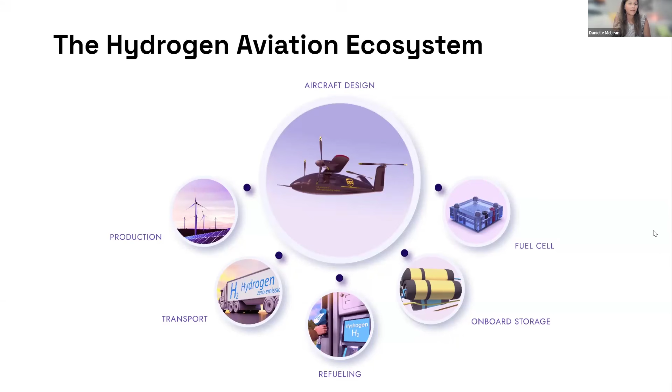So if you produce hydrogen, we need it, so you're part of the hydrogen aviation ecosystem. If you move hydrogen, you're part of it. So you don't have to specifically be building an aircraft to be part of this ecosystem.

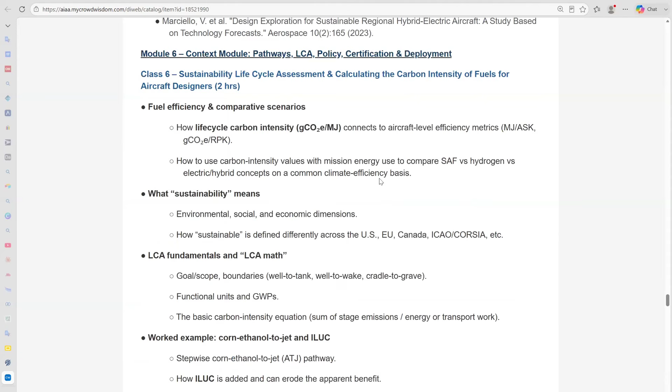This is going to be a really awesome course. We have 6 modules: combustion and engine integration, aircraft propulsion, design, materials compatibility, fuel systems, and safety. Then there's aircraft infrastructure, logistics, cross-border SAF supply chains, the MDO, digital frameworks, and lastly pathways, policy certification, and deployment.

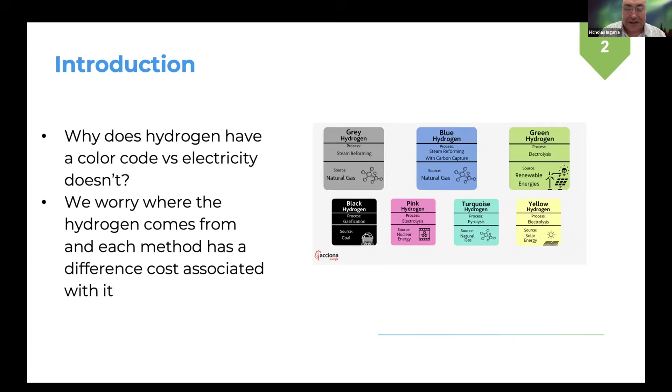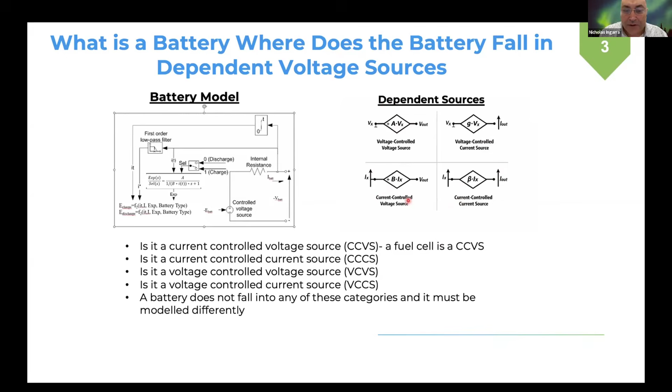And so Danielle already covered about me. So what I wanted to do to kind of gauge everyone, to get everyone's feet wet on the presentation - a lot of us have to work together to achieve the end goal. We need people to go, how does it work? How do I use it? How do I make it? How much does it cost? And how do I market it? We need people in every one of the groups to convey this message. My area of expertise is how does it work. So I'm trying to help unlock everything in the how does it work end of it so we can hand it off to how do I use it.

How do we make it? How much does it cost and how do I market it? A lot of this is going to focus on how does it work?

The other side note is I kind of look at everything from a thermal background, from power in, power out, energy in, energy out, and inefficiencies lead to heat. So we're getting a partial thermodynamics lesson here as well.

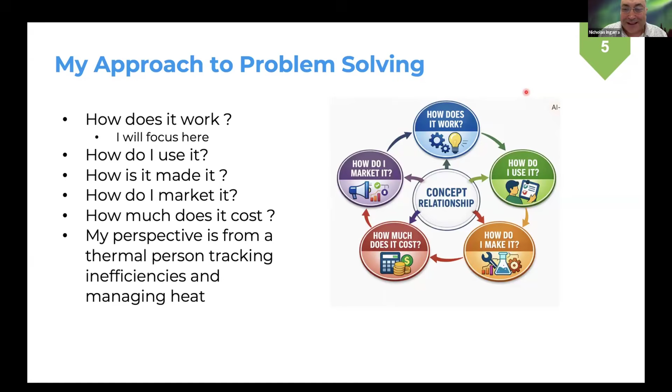When we think about aviation in general, we need to think of three different models that need to work together. We're going to have the vehicle model of the plane, which is used to determine the power and energy that's required. We're going to have a powertrain model, which is delivering power from the source to the propellers - basically how we're delivering the power.

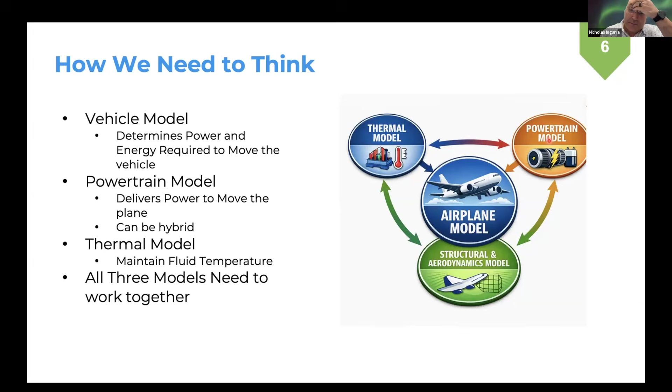We also have the thermal model. The thermal model's job is to take the inefficiencies of the powertrain model and maintain all the fluids at the right temperature so we don't get power limiting based on, let's say, battery temperature, or power limiting based on engine temperature. So we need all three of these models to work together to achieve the overall end goal.

Just to walk through the vehicle model and the math: we can take the aerodynamic parameters of the airplane, compute the power, and then with the mechanical efficiency and propeller efficiency, we can compute the amount of power the powertrain has to deliver. Note, when we're dealing with a vehicle model, we're dealing with the power at the end point.

So we have to convert this power to what the powertrain needs to deliver, and that's normally done through the inefficiencies of the driveline. You have to take the efficiencies of your transmission, in other cases the inefficiencies of the inverter - all those inefficiencies to compute the actual power that's needed at the source.

Another couple points to keep in mind as well: batteries can only store energy, and fuel cells in other cases - which is a key point - can provide power on demand, like the internal combustion engine.

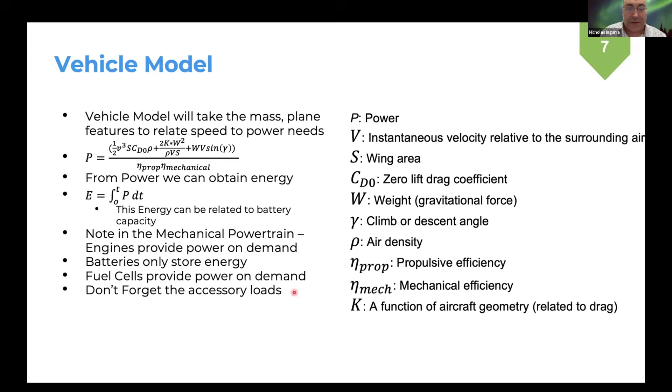One other friendly note: when you're doing the vehicle modeling, never forget to add in your accessory loads - that's your low voltage system, your climate control system. All those loads need to be provided by what the powertrain needs to deliver.

Now with part of the vehicle model, we need to understand power and energy. This reference came out of an ACS paper in regards to power and energy profiles. When we're selecting a power source, we need to find something that can meet our instantaneous power demand, then our cruise demand, and then our descent.

One thing to keep in mind as a point of reference: when we're dealing with internal combustion engine powertrains, they're providing power on demand. So when we're taking off, we can hear the engines ramping up to a high power load to satisfy the takeoff, and then they slowly ramp down to provide the power for cruising.

In the case of a battery system, the battery would have to provide the power that's needed for takeoff and then provide cruise. And in the fuel cell case, we need the fuel cells to provide on-demand power for climb and for cruise. So we need to keep these in mind for the power and energy requirements throughout the whole profile.

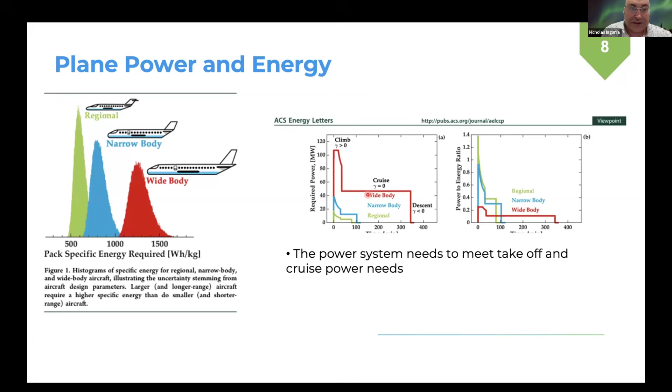We need to understand what our power profile is so we can compute the energy that's needed. Here's a case borrowed from the automotive world as a sample. Normally if you have your speed profile, you can compute with the vehicle model your on-demand power that's needed, and you can do this for each case.

This allows you to compute the instantaneous power. We do this to determine what the peak power, average power, and min power is in the system. And if we know power, we can integrate it to come up with the energy required. In a study like this, you can determine how much energy or battery capacity you need. And if you don't have enough battery on board, you can determine, hey, I need to recharge here and recharge here based on how many batteries I can package.

So we have to use our vehicle models to basically get our power profile that's required. We need to integrate that to determine how much energy we need. And based on also knowing the power profile, you can also determine how big of the hydrogen system do I need to support my flight.

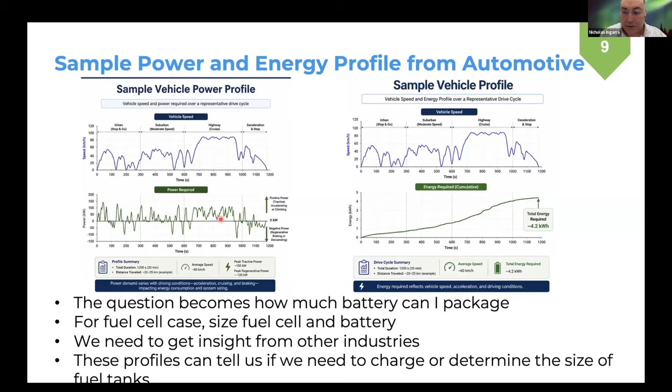Now let's take a look at the powertrain models to compare battery system to a fuel cell. So we have the propellers in both systems. We have the electric motors. We have the inverters in both of those cases.

The other difference is where we're getting the electrons from. In the fuel cell case, we have the hydrogen tanks providing the fuel cell stack with hydrogen to produce electricity. Then we have a boost converter to step up the voltage and current, or the inverter to the motor. In the case of a battery electric, everything is solely coming from the battery.

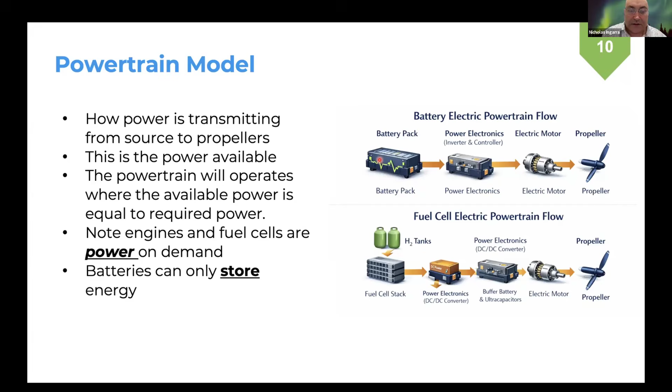One key note we have to emphasize is that a fuel cell can provide power on demand, and the batteries can only store energy. So we're either withdrawing energy that we have stored, and the battery can also accept energy too. So we have two different devices that do different things, but they also complement one another.

To touch on the really complicated system where I've spent most of my career, basically the thermal system. The thermal system is dealing with all the inefficiencies in the system, all that waste heat that has to be removed, and it has to handle the heat exchangers to cool the engines, or to cool the batteries, cool the fuel cells.

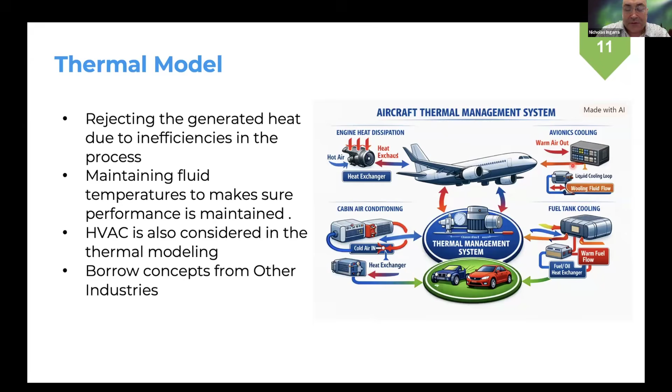In the case of batteries and fuel cells, we have to cool and we have to heat. The thermal systems will also have to handle the HVAC for the conditioning of the air, in the cases of the fuel systems to cool the fuel, and also for the power electronics cooling. So the thermal system is one of the key systems we need to look at when approaching aviation, because all three systems have to work together to actually get accurate results.

To add some humor and break the ice to make sure everyone's awake, think of batteries like babies. They can't be too hot. They can't be too cold. They've got to be kept at the right temperature. So we need to heat them and we need to cool them in those instances.

And the fuel cells are like the diva, where we can't have them too hot, we can't have them too cold, but the only difference is we need to maintain the relative humidity and the water content correctly. Because if we don't maintain the water content in the fuel cell, we'll either lose efficiency due to ohmic losses or we'll lose performance due to flooding.

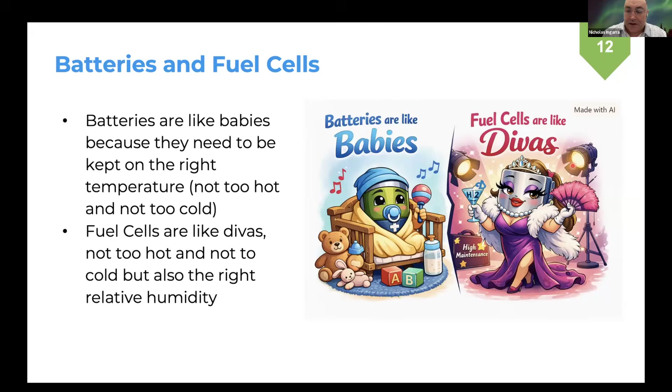Now I'd like to compare both technologies to one another, and I'm going to throw in some fun thermodynamics too. In a battery case, both systems are considered electrochemical systems that convert chemical energy to electricity. But here's some of the differences.

A battery has three different discharge modes: constant power, constant current, and constant resistance. I'll show those graphs a little later. The battery performance also depends on its C rate and its state of charge. And we have to note that batteries can provide constant power, but not at constant voltage.

A fuel cell is different than a battery. It's a steady state device because it's like an engine, but it doesn't store the energy. It basically converts the hydrogen and oxygen into electricity, water, and heat. Fuel cells mainly have one discharge mode because it's an on-demand power source, and its properties are constant as long as you're providing the fuel.

So when we get into the battery system, a battery is kind of like a closed system. Think of putting a prime rib into an oven and the oven's sealed up. You have it sitting in there and you can only heat it or cool it by turning the knobs on the oven. So closed systems are a little bit harder to cool than open systems, where in an open system mass can enter and leave the system.

So I can either cool a fuel cell by transferring some of the heat to hydrogen, transferring some of the heat to air, or transferring the heat to the coolant.

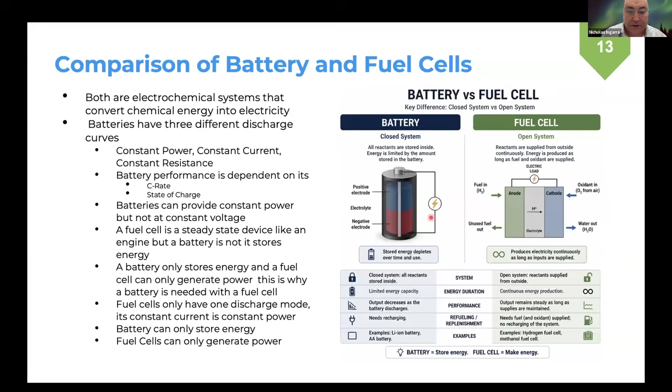One of the keys we need to look at when comparing technology is something called the Ragone plot. The Ragone plot basically compares specific energy to specific power. Specific energy is how much energy is stored per kilogram, and specific power is how many watts generated per kilogram.

This chart compares capacitors to ultracapacitors to flywheels to the internal combustion engine, older battery technologies, and fuel cells. Fuel cells have pretty good specific energy compared to the combustion engine. Batteries are somewhat close on specific power, but you have limited run capability based on the battery. So fuel cells can do the job on a little less weight, but we should note both batteries and fuel cells cannot replace the full power of the internal combustion engine.

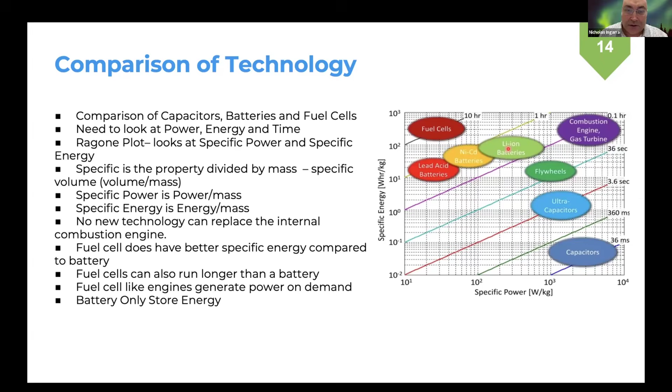The internal combustion engine wins out on power and energy, but it seems like number 2 is the fuel cell and number 3 would be the battery. Keep in mind, it's not a one-size-fits-all scenario. Some cases you will need a fuel cell, some cases it will be a battery. We need both technologies to go forward in the aviation industry, and it's a case-by-case basis.

Another type of Ragone plot compares different battery technologies to one another. The newer technology coming out is sodium. It's a little less on power density, mainly because sodium is heavier than lithium, but it offers some differences, like you can fully discharge a sodium ion battery. Lithium ion batteries can't be fully discharged to zero; you have to keep their minimum cell voltage about 2.5 volts per cell.

But you can see where the lithium ion energy and power density is. The only way to maximize the energy density is with a lithium metal anode, and some companies are looking into lithium metal anodes right now, but you need pure lithium metal anodes to push the volumetric density. The other reason lithium ion batteries have higher energy than sodium is you get 4.2 volts per cell, while sodium's approximate open circuit voltage is about 3 volts. OCV just stands for open circuit voltage.

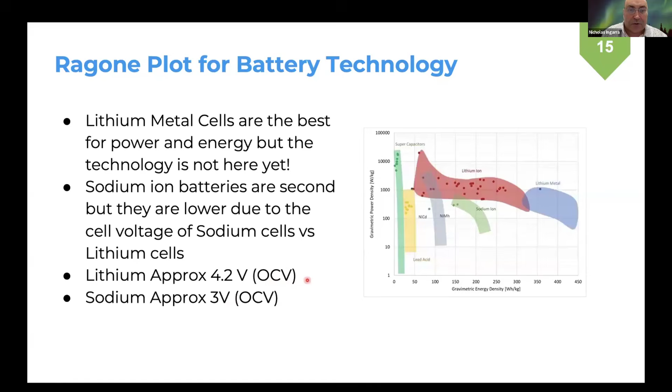Another note on battery chemistries: lithium ion has several different chemistries. You have lithium cobalt, lithium manganese, lithium iron phosphate, nickel manganese cobalt, NCA which is nickel cobalt aluminum, and LTO which is lithium titanate. Typically in batteries you'll always have a trade-off chart because you can't have your cake and eat it too with the technology. If you get something with good power density like LTO, it's not going to have great energy density, so you'll have a weight penalty.

So you have a couple different types of batteries, which can basically be broken down into power batteries and energy batteries. Power batteries are like your sprinters, and energy batteries are like your marathons. Power batteries can give you rapid power but don't have great energy storage, while energy batteries can give you great storage but don't like to discharge at extremely high power rates.

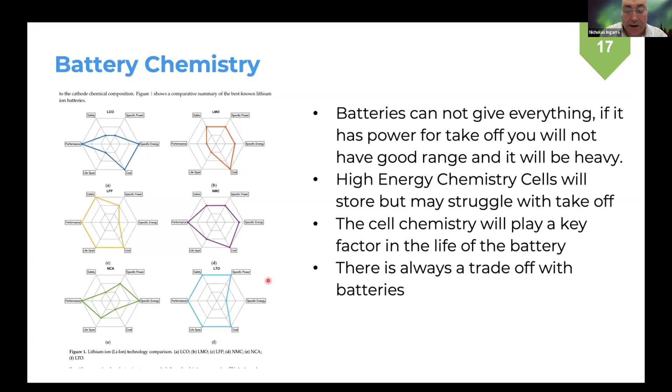So you can see there's always trade-offs on power, energy, cost, life, performance, and safety. You have to find a battery that'll meet your requirements and also meet the weight requirements too, since weight is critical in aviation. Now here's some of the differences, kind of like an A to B comparison of batteries to fuel cells.

A battery is a storage device compared to a fuel cell, which is power generating. As we mentioned, we have a closed system, so no mass is allowed to enter or leave the battery. Fuel cells are open, so as long as we're providing mass to the fuel cell, it will provide us with power. Our battery is a non-steady state device, so we have to model it differently compared to a fuel cell, which is more of steady state.

We can have constant power, but not at constant voltage. For fuel cells, we can get a constant power delivery out of it. For a battery, its efficiency is going to be continuously changing, and I'll show this a little bit later on with breaking down the battery data. Fuel cells have a steady state efficiency, so whenever you're hearing an efficiency calculated on a fuel cell, it's provided under steady conditions with a steady flow rate of fuel, steady flow rate of air, and a steady output.

Another factor we need to keep in mind when selecting batteries and fuel cells for our application is that chemistries have different operating ranges and can only do so much. For instance, the nickel cobalt aluminum chemistry can operate from 0 to 45 C, and keep in mind these are noting the charge and discharge cases. You can go up to 50 C for nickel manganese cobalt and 60 degrees C for LFP.

Typically you can charge your battery between 0 and these temperatures, but when the temperature drops below 0 degrees C to minus 30, your battery can only discharge, it cannot charge. So if your battery is cold, you need to heat it up and precondition it for charging. If you're flying at elevation and your battery starts getting cold, you're going to have to warm it up to get it out of this temperature range so you can charge.

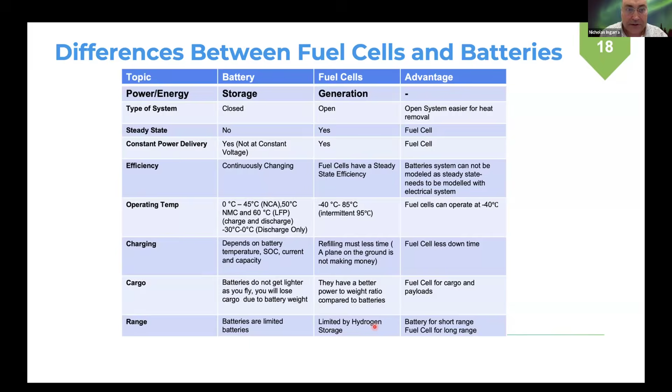Now here's a precursor on battery efficiency. Right now, when you say a battery efficiency is between about 90 to 95% efficient, that's based on the combination of the coulombic, or sometimes the Faradaic, and the voltage efficiency. The coulombic efficiency is basically the discharge over charge ratio.

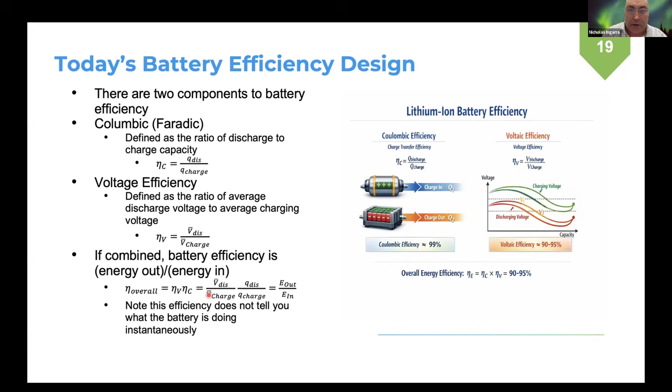So how much charge am I taking out versus how much I'm putting in? The voltage efficiency is my average discharge voltage divided by my average charge voltage, which is based on energy out over energy in. But this efficiency doesn't tell me real time what's going on. This tells me on average from point A to point B what this efficiency is. It does not tell me real time what it is.

So now you have a dynamic map for the battery. Its performance is changing real time on how efficient the battery is over, let's say, 100% to 10% state of charge, because we could never hit zero. So this is a proposed efficiency change that we need to make for batteries, which is eventually going to impact how we model battery systems.

I'll jump into a point I've emphasized before. Batteries have three distinct modes of discharge: constant current, constant resistance, and constant power. Which one do we need for our application? Well, the answer depends on the type of load that you put on the battery. And we'll also have to note that the resistance, the voltage, the power delivery, and efficiency are all a function of the state of charge, the C rate, and temperature.

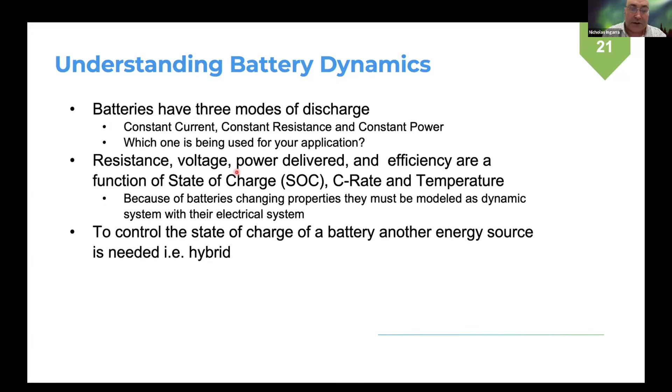So we have to start modeling batteries dynamically. One other side note is that if it's a hybrid system, so if the battery is paired with another component like an engine or fuel cell, you can control the state of charge of the battery and therefore almost get constant properties out of the battery. But this can only be done if you have another power source and the battery is not the only power source. So let's walk through the battery.

On the other hand, a PEM fuel cell's fundamental unit is a polarization curve. Based on providing a given amount of hydrogen and a given amount of air, you're going to get a discharge voltage based on a current density. As the current density rises, you can see what's happening to the power—voltage drops, current starts going up. It's analogous to an engine curve where you have a peak torque and a peak power. In this case, you're going to have a particular voltage, and then you can see what happens to the power, and you're going to have a peak power on the fuel cell.

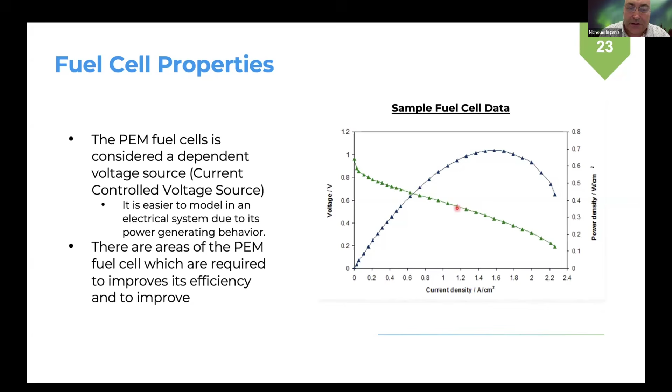So your ultimate goal for fuel cell design is to try to hit an optimum peak power point of what's going on. But these values are steady state values as long as the hydrogen and air are flowing to your fuel cell system.

And for constant power, your voltage starts dropping greatly because your current is going to be continuously increasing. So what happens in the constant power discharge, which will affect your modeling, is that your current starts increasing as voltage decreases.

So what does this mean? As current starts going up, your heat generation is going to go up due to joule heating, and the electronics can actually get less efficient, so you have to size your thermal system differently. You're going to need more rugged cold plates to get the heat out and prep for more heat generation, so you need a pretty good thermal system.

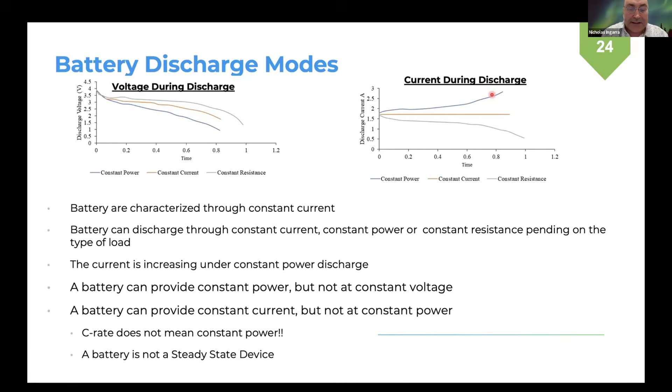So you can see constant current discharge, current remains constant, but under constant power, your current is always increasing as a result of your voltage decreasing. Please keep in mind, a battery is not a steady state device, so when you say C rate, you're not actually getting constant power.

So I mentioned before that the discharge voltage of a battery will depend on its state of charge and current, and the battery's not a steady state device. But I'm going to break down battery data and show you what the true resistance is of this cell, the power delivery, and the heat generation of this reference cell.

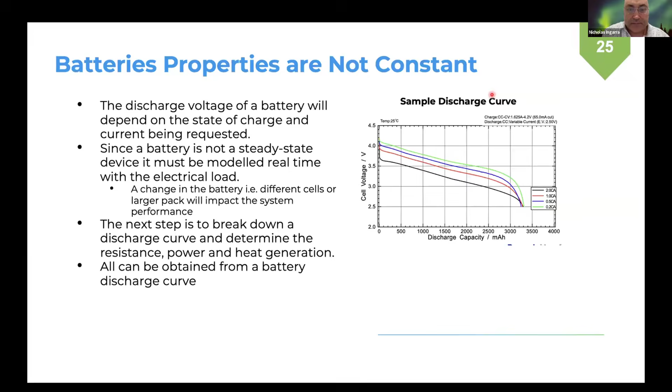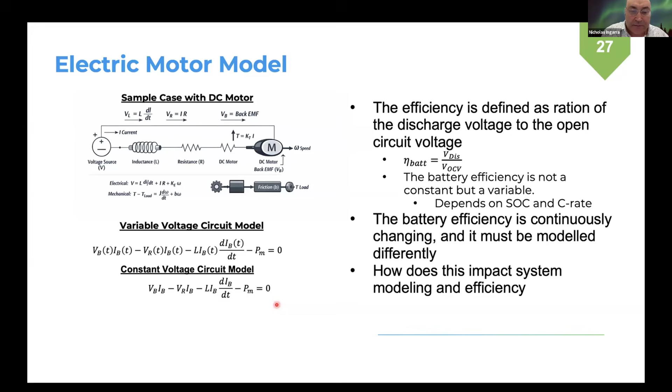And the efficiencies of the battery change are going to affect the variable voltage circuit model. Sorry, it's a little bit of a tongue twister.

We'll have to keep in mind with batteries that you have two different modes of charging. You'll have a constant current mode of charging, and then constant voltage charging. During constant current charging, your voltage on your battery is going to be increasing, so the charger is going to increase the voltage on its end to maintain constant current up to a certain point. But with lithium-ion cells, we cannot risk overcharging them and causing thermal runaway, so we eventually have to transition to a constant voltage point. When we have a constant voltage point, we set the voltage constant, and then the current is going to be changing. We have to do this at approximately 80%.

That's why with our battery electric vehicles, you can rapid charge up to 80%. And then it takes the longest for the remaining 20%, because you have to go with a constant voltage charge at that point to get it to 100%.

Keep in mind that a grounded aircraft isn't making us money, so we need to try to minimize charge time, and we need to factor in charge time.

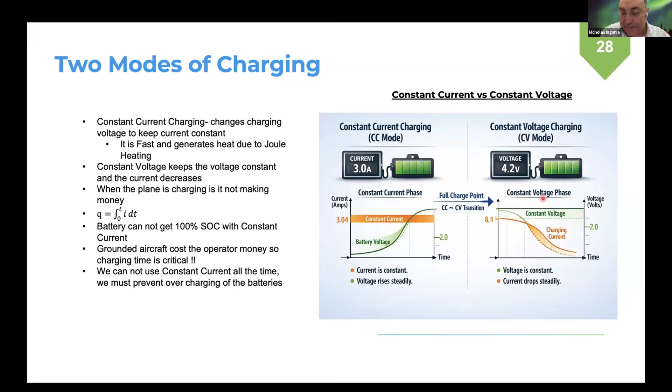Here's an overlay of how you would do charging for a pack. Under constant current, you charge up to a particular time, and during that time you switch over to constant voltage, where you can see the charge current drops off to finish the charging. It takes a lot to get there - this is the easiest part, but it's the hardest part getting that remaining 20%.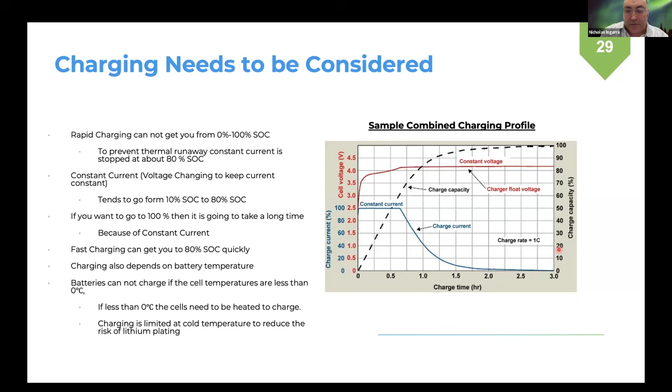Keep in mind too, if there is a cold battery, you need to charge it after you warm up the cell. You need to get the battery above 0 degrees C to prevent dendrites from forming and to get good charging. We've done the comparison of the powertrains.

So I'm going to go into one of the topics of comparing technologies of battery to fuel cell, which is basically what's called pump to wheel. It's borrowed from the internal combustion engine, basically from pumping in the fuel to the wheels.

Initially, I was told that batteries are much more efficient than fuel cells, based on like 70 to 75% versus 35 to 45%. But this is based off of a 95 to 98% efficiency. If we actually look at the real-time efficiency of a battery, this will bring this number down, which will impact the inverter, the electric motor, and the drivetrain. So this efficiency was based off of the original non-real-time efficiency.

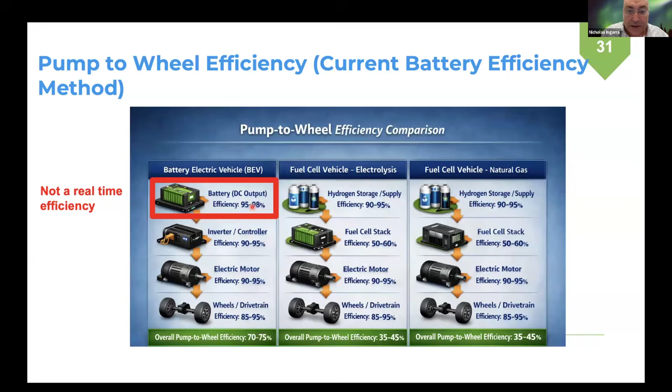That's how the comparison of battery electrics to fuel cells efficiency started. The battery efficiency is going to be changing real time, and this needs to be taken into account. To elaborate on this point - pardon the pun on current research - there's going to be an article published in a magazine called In Compliance that will go through this in detail.

One of the findings of the research I did was that input voltage will affect the current draw on a system under a constant power discharge. I took a battery electric vehicle and ran it from 630 volts up to 800 volts, putting a constant power load on it. As you can see, in certain cases, as the input voltage increases, the required current decreases.

How does this impact me? At higher currents, we're going to have joule heating, which leads to higher heat generation. The reason we went to higher voltage is to lower the current. But in a battery system, as voltage starts to come down, our current goes up, and so does our heat generation, which impacts the efficiency.

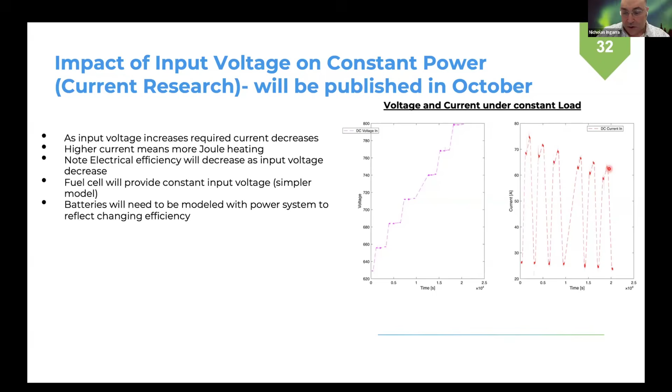This is an apples to apples comparison of the technologies to one another from a previous chart. WoW is worst of the worst case, and BoB is best of the best. If I assume constant efficiencies of the batteries as discussed before, a battery electric at worst case could be 65.4% compared to best case 84%. If we change the efficiencies based on that one cell - showing like 98 to about 75% efficient - we can see the efficiency drops to about 51.6%.

We should also note why there are stars here - as the input voltage changes, these components' efficiency has to be calculated real time based on changing input voltage. Based on the fuel cell, we can see its worst efficiency is about 34.4% compared to about 51.4% for best case scenario, with 60%.

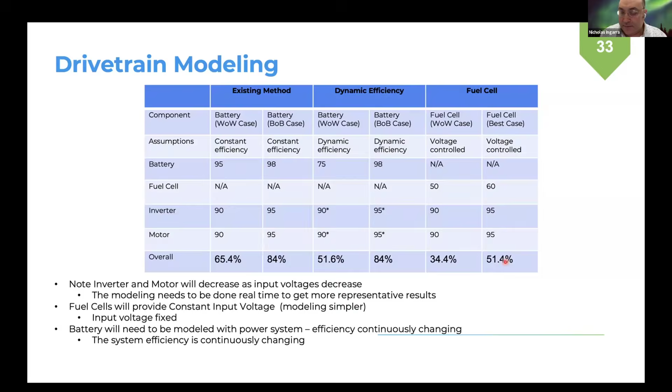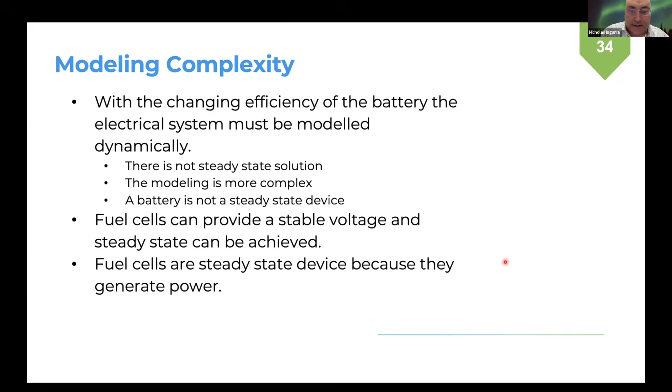In summary, we're going to have more modeling complexity - we'll have to model battery systems dynamically going forward on the battery side, mainly because a battery is not a steady state device. Then there's the other efficiency calculation, called the well-to-wheel efficiency, which is a way of comparing from the overall source of the power to the wheels.

As before, one of the reasons why battery electric is dominant is because of this 90 to 95% efficiency, which is not a real-time efficiency. Your hydrogen from electrolysis is about 25 to 35% efficient from electrolyzing the hydrogen to the wheel. And if you get the hydrogen from natural gas, the overall efficiency is about 30 to 40%. But the pump to wheel efficiency doesn't change, so it depends on how you get the hydrogen. But here's the key difference in battery electric: that number is not a real-time efficiency.

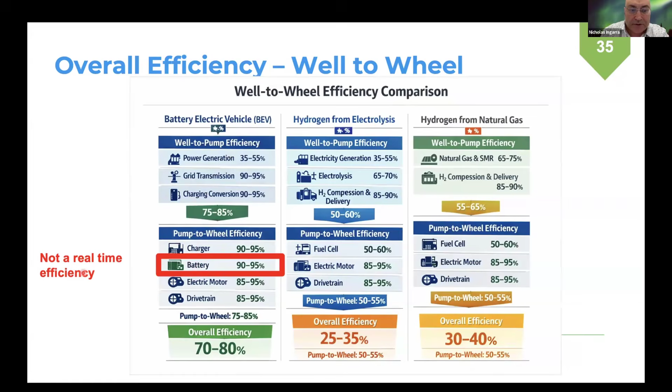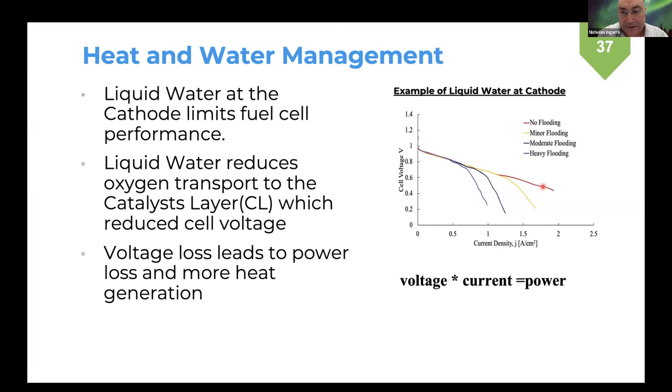Now I'm going to get into the challenges for the fuel cell going forward. One key issue with the PEM fuel cell is what's called flooding, which is a buildup of liquid water on the cathode, specific to PEM fuel cells mainly. If you don't get that water out, you lose your oxygen concentration, which pulls down your cell voltage. If you don't have any flooding, you can get a higher current density, and therefore higher power. So we have to manage the water and heat to mitigate flooding on the fuel cells.

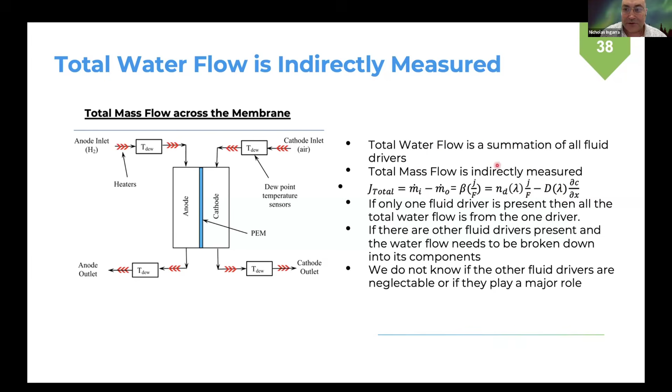Why does this occur? When we measure the water flow across the membrane of the fuel cell, we're measuring the summation of all the fluid drivers present. We can't measure an individual fluid driver by itself, only the summation. A better way of looking at it: there's two numbers that add up to 3, and you can't guess what one of the numbers is. You can't say one number is 1 and the other is 2 to get 3. You have to determine them mathematically and from theoretical models to know how much is electroosmotic drag and how much is back diffusion.

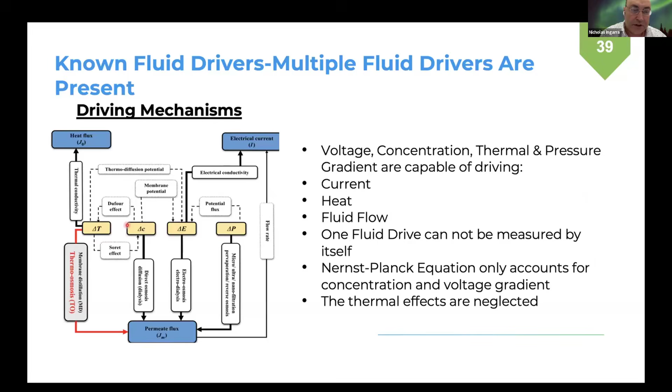Keep in mind there are many different ways to drive fluid flow in a fuel cell—we can drive it with temperature, concentration, voltage, and pressure. So we need a good understanding of how pressure, voltage, concentration difference, and temperature affect water flow. Currently, the Nernst-Planck equation only takes care of two of these, concentration and voltage, so we still have to assess the thermal effects.

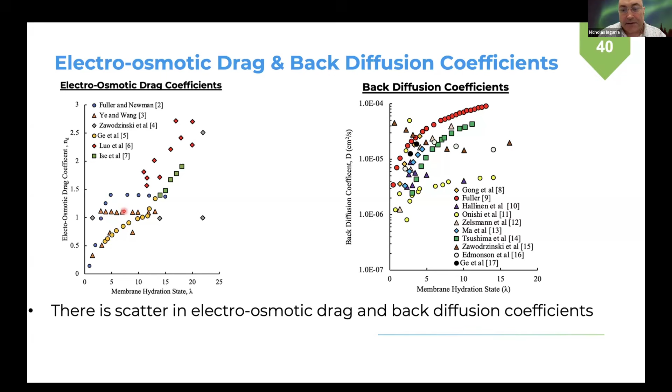Another item impacting water management on the fuel cell: we have a lot of variation in these electroosmotic drag and back diffusion coefficients. There are several empirical models out there, and each one, based on the hydration state of the membrane, gives different values. So we have a lot of scatter in these coefficients, and each can lead to different effects on calculated water flow across the membrane. The same applies to back diffusion. We need to find out where these models are valid and get them condensed down to which ones are applicable, and whether they have other fluid drivers baked into them.

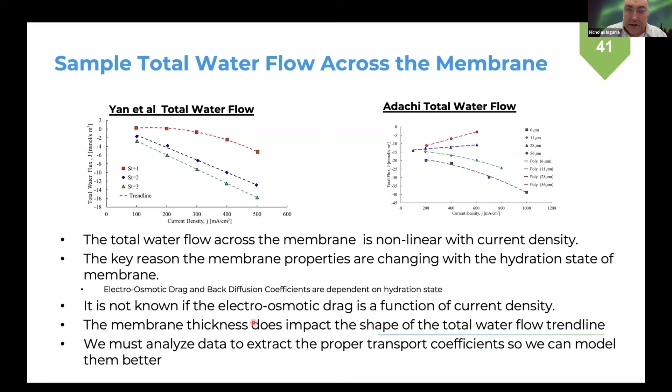Because what could happen is they might not have separated out the other fluid effects. The water flow across the membrane is very complicated—it's nonlinear in some cases, and pretty linear in others. This is a result of the membrane properties continuously changing. There's a speculation out there that electroosmotic drag is not a function of current density, so we have to understand the mechanism better, understand how membrane thickness impacts total water flow, and analyze these systems to extract the proper transport coefficients so we can better understand the models I showed on the previous slide.

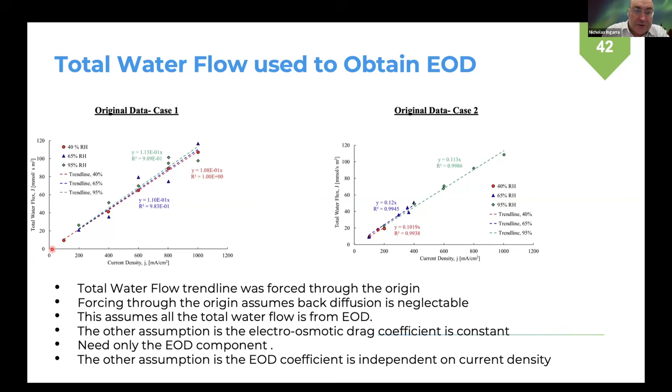Here's a sample case of one of the models that was done. What they did was force the trend line through the zero point, which assumes no other fluid drivers are present. By doing this, we don't know if the back diffusion was completely negligible or not. So we basically refit the data—if you fit it to a linear trend line, not through the origin, you can see this term right here can go with this A1 term.

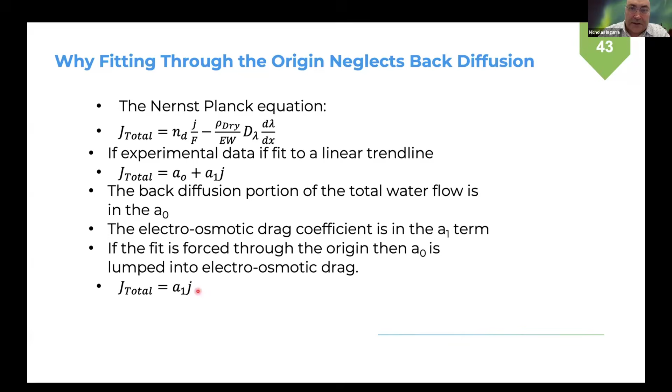This term right here can go to the A0 term. So if you just fit it to a line going through the origin, you're lumping this back diffusion effect into here, which is one of the reasons why there's so much speculation and scatter in the electroosmotic drag and back diffusion models.

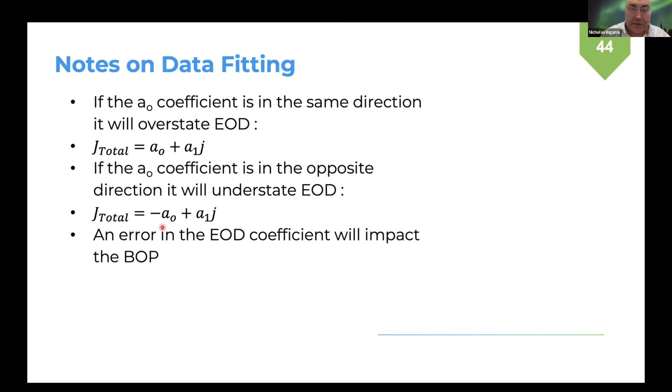So what'll happen is based on these coefficients, you can see if their signs are the same, the other effect is working with you and you're going to overstate your effect. And if the coefficient is negative, it's working against the other driver, and it's going to understate how much water there is, which will affect your balance of plant and the rest of your fuel cell sizing.

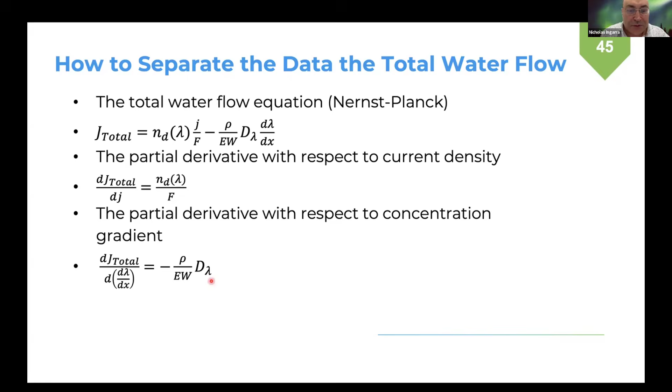Here's the method that I basically did my doctoral work on, how to separate the water flow. If you take the partial derivatives of the equation, you can get the electroosmotic drag term and the back diffusion term with some good old partial derivatives and equations of state. Then if you set the equations equal and take the partial derivatives of your terms, you can compute the electroosmotic drag coefficient based on experimental data and validate the model.

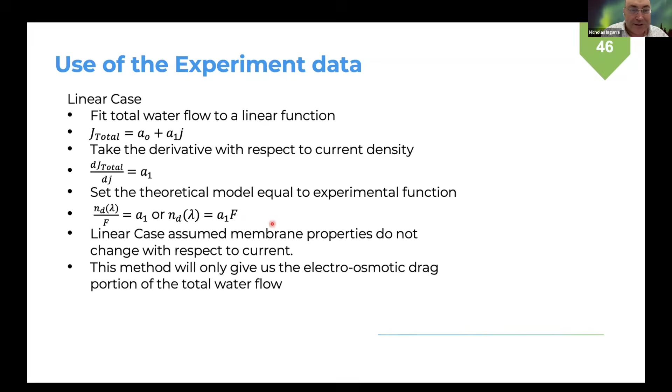So this is what I did my whole PhD work on, the electroosmotic drag and back diffusion. Let me know if you're interested in talking about that in detail. Then if you have the nonlinear case, you repeat the same method and you can solve for the electroosmotic drag coefficient, which will allow you to help validate your model and improve your water management.

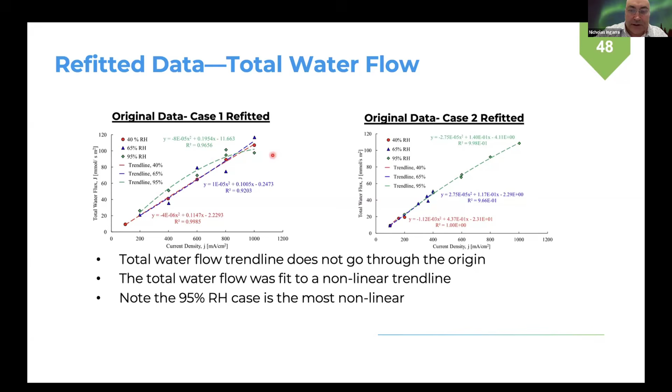So when I refit the data that we saw before, I'm seeing the data doesn't go through the origin, and I used a polynomial fit because there was some non-linearity in the data, just to get an accurate case. And then you can see at 95% relative humidity, which gets into a mechanism of single phase versus two phase, trying to capture that phenomenon.

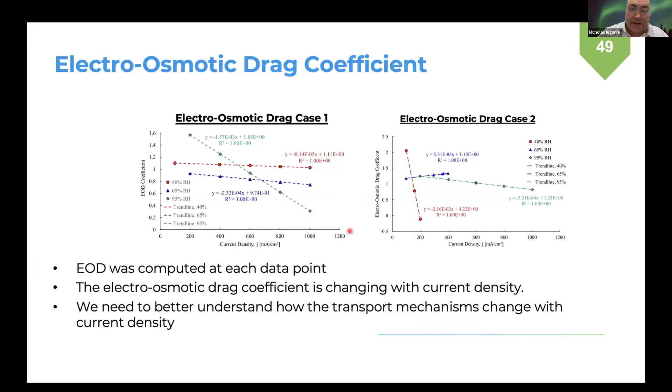When you process the data this way, you're actually seeing the electroosmotic drag coefficient as a function of current density. So we need to understand this mechanism even better, why it's changing with current density.

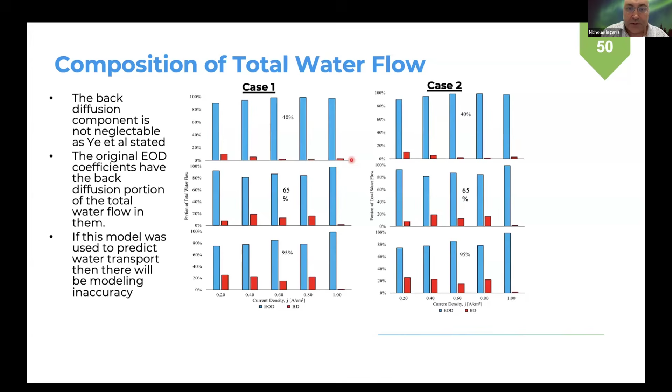And when I process the data even further, I'm actually seeing these red bars should not be here, because this is the back diffusion effect. So that one original model said the back diffusion was negligible. It's not, and it actually does contribute. So that's part of the reason why we see some of the scatter on these electroosmotic drag coefficients.

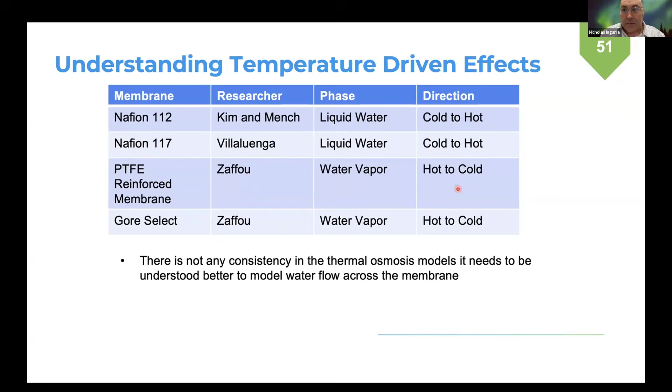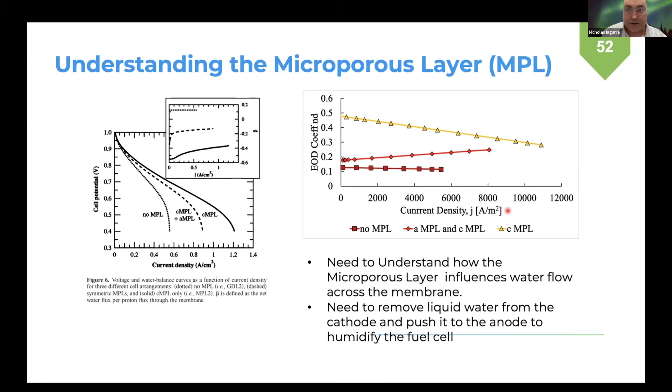The other phenomenon that needs to be understood is called the Schroeder paradox, not the Schrodinger cat experiment, the Schroeder paradox. What happens in the Schroeder paradox, which is kind of contradictory, is that when you put water vapor in a fuel cell, you get so much water vapor that moves across the membrane. But when I put liquid water in the fuel cell, I get more water transport across the membrane, which is a contradiction.

We expect more vapor to move versus liquid. This phenomenon was discovered in the 1900s, and no one has found a good solution to the Schroeder paradox. So this is another item that needs to be addressed to address the water management in the PEM fuel cell.

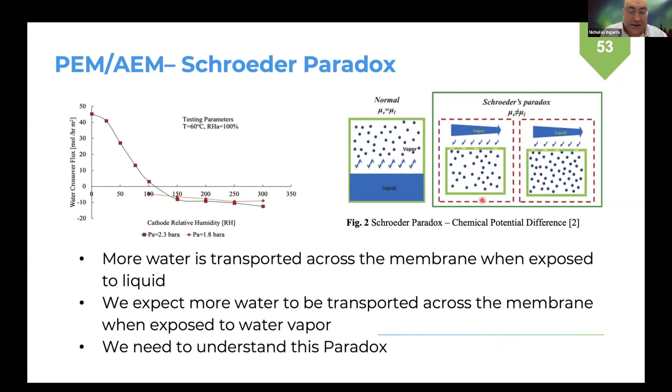AEM is the anion exchange membrane, which is another type of fuel cell, different from an alkali fuel cell. The other item we need to address, how the water flow affects everything, is basically on the balance. So with a fuel cell balance of plant, you've got a compressor, you've got the humidifier.

So the ultimate goal is we want to understand the water management so we can eliminate the need of this humidifier. I mean, we're still going to have a coolant pump, we're still going to have the heat exchangers, but we need to understand the water management so we can at least address the humidification and get good operation of the fuel cell.

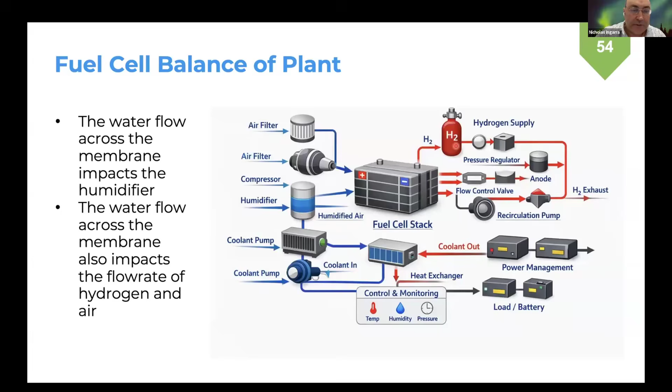And once you understand how the humidification works, you can understand what stoichiometry of hydrogen we need to provide to the fuel cell, because that's how we humidify the hydrogen.

One other point we need to address is how do we cool the fuel cell? One of the complex vehicles out there is the Toyota Mirai. It actually has two radiators used to cool the fuel cell. They're trying to maintain the fuel cell between 60 to 80 degrees C. It's called a main and auxiliary radiator. One radiator can't do it all.

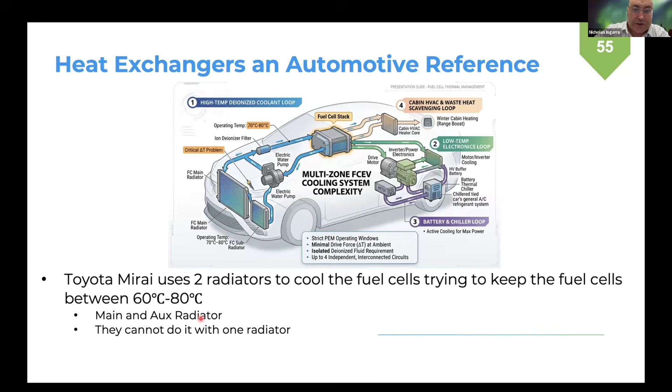One of the reasons why, which I'll get to next, it's a tube fin technology and not plate fin. But we need heat exchanger development to support the removal of all this heat from the fuel cell. So just to kind of quantify our heat generation and why we need heat exchanger research.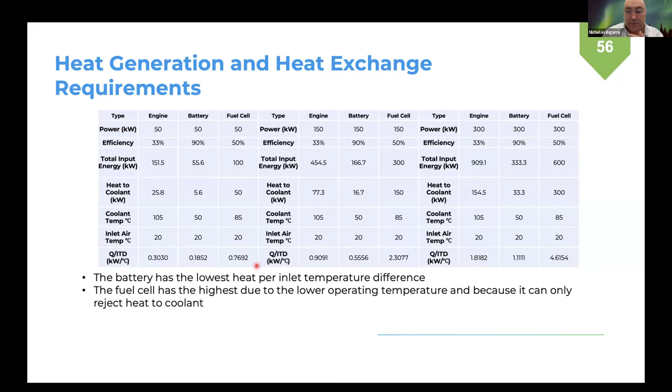And how we get there is several different ways. One of them is we have to increase the surface area of the heat exchanger. This UA is the overall heat transfer coefficient. The fuel cell heat rejection only goes to the coolant.

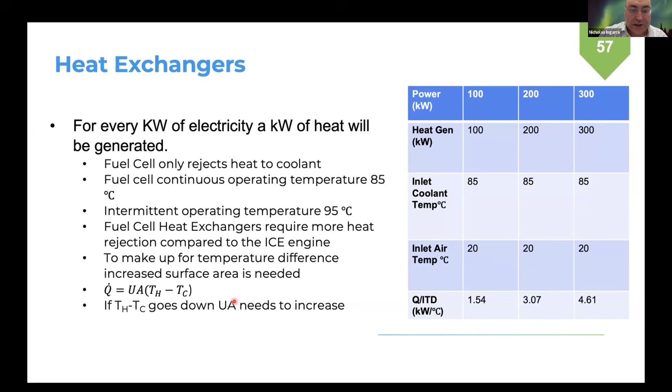So we need something that can handle all this heat. The rule of thumb for a fuel cell is every kilowatt of electricity gives you a kilowatt of heat. So we need to increase the surface area as much as we can on these heat exchangers. And how do we do that?

In the case of the Toyota Mirai, they're using what's called a plate fin heat exchanger. A tube fin heat exchanger has these extruded tubes, so you don't have that much surface area. Plate fin heat exchangers are basically like making a sandwich, with hot side fins and cold side fins. So we need to increase the surface area with hot side fins and cold side fins.

We need a coolant pump that can handle the pressure drop across this heat exchanger. These are samples of different types of fins that you can use, so you need to optimize fins for their application. Typically for air heat exchangers, you need louvers. For coolant, you're going to need these lanced offset fins.

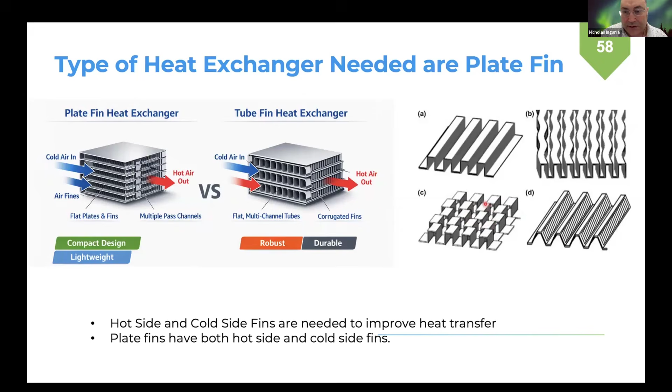We also need to use the NTU method, which is the number of transfer units. This is a way you can determine what kind of effectiveness I can hit with a heat exchanger based on knowing the ratio of my hot thermal fluid and my cold thermal fluid. In this case, for a fuel cell, the hot thermal fluid is your coolant, and your cold thermal fluid is air.

Your cold thermal fluid is air. So if you're trying to hit a particular, let's say, NTU target, knowing your coolant flow, you need to solve for your airflow and the temperature difference.

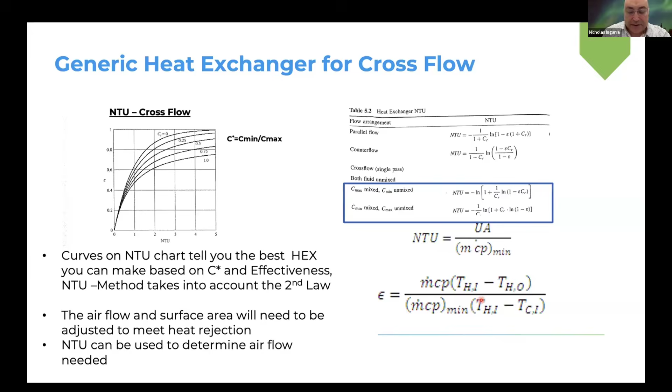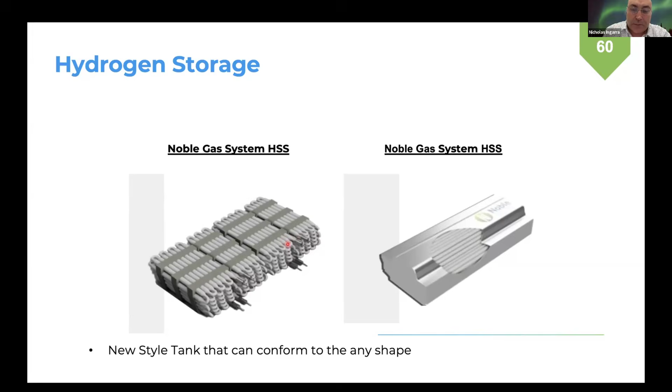So, sample NTU calculation and how to calculate the effectiveness. The other item we need to address is hydrogen storage. Here's a sample company not far from me in Michigan called Noble Gas Systems. They have what I call an intestine-style tank system for storing hydrogen. We need to find hydrogen systems that can fit in the form factor of a plane. These are formable, so that's something we need to look into for aviation. We need to commonize a way, whether between 350, 700 bar liquid hydrogen, or cryocompressed.

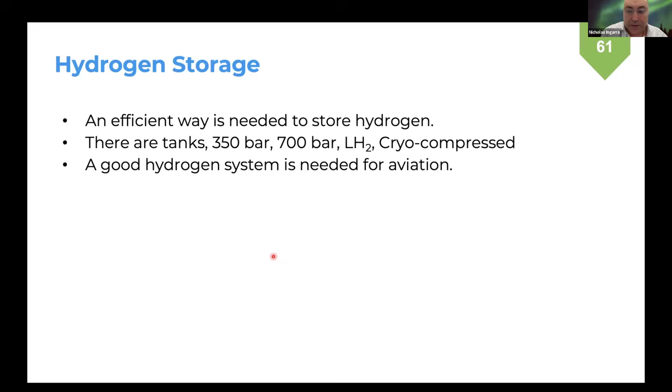We need to also examine how to get hydrogen into different areas for remote locations, because hydrogen is portable. In summary, sorry for running long, battery efficiency is not defined in real time, and we need to start looking at it as real-time efficiency. This is what's making batteries appear more efficient than they are, and we have to model the battery completely differently. We need to address the heat and water management of the fuel cell, and we need heat exchanger R&D to support higher heat rejection at lower temperature differences. We need to look at total cost of ownership.

We also need to keep in mind it took 100 years to master the internal combustion engine. The fuel cell has only been around since 1969. We need batteries for aviation, and we also need fuel cells for aviation. We need batteries for short range light load, fuel cells for long range heavy load. We can't have a one-size-fits-all solution. We need all technologies. We must capitalize on the strengths and weaknesses of each technology so they can work together and help each other out. Lastly, we need to model the battery electric plane with real-time dynamic efficiency.

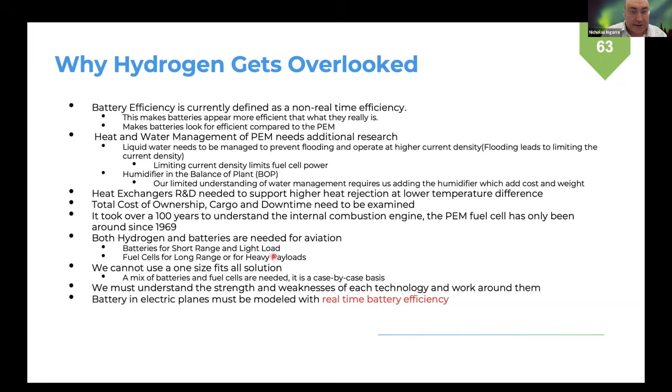I think that sums up my thoughts. The other main question is, since I've presented a lot of information for future reference, what topics would you like to learn about next? I wanted to thank everyone for their time listening to my talk. Would you like to know more about batteries, fuel cells, powertrain, thermal discussion? I can talk about any of these topics in detail. So, thank you for listening, and any questions?